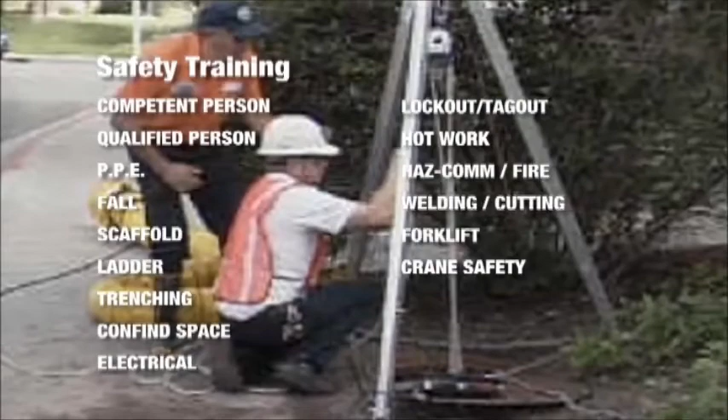Safety training topics: competent person, qualified person, PPE, fall protection, scaffold, ladder, trenching, confined space, electrical, lockout tagout, hot work, HAZCOM, fire, welding, cutting, forklift, and crane safety.

Foreman training. OSHA 10-hour. All crew leaders, foremen, supervisors, and designated safety personnel will be required to have taken the OSHA 10-hour in order to run any crew on Construction Zone projects.

Job hazard analysis. Introduction. Many accidents can be reduced if we work together and share our safety knowledge. Job hazard analysis, or JHA, is a basic approach to developing accident prevention procedures by documenting the first-hand experience of workers and supervisors. A JHA can be a central element in a safety program.

JHAs can be used to orient new employees to specific work tasks, and as training tools when performing tasks that are not routine or involve special situations.

Job hazard analysis involves four basic steps: one, select a job to be analyzed; two, separate the job into basic steps; three, identify the hazards associated with each step; four, control each hazard.

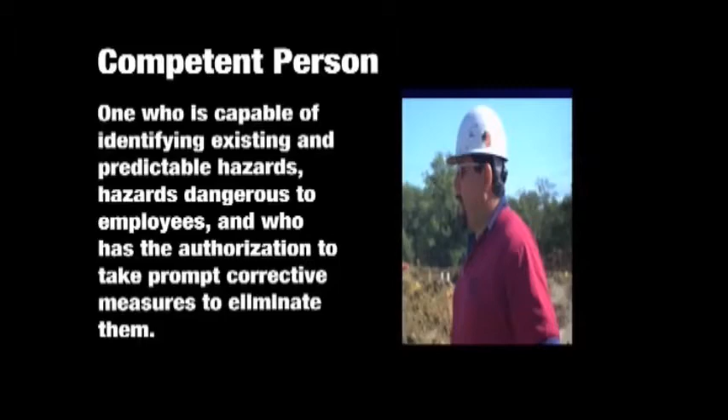Qualified person: one who, by possession of a recognized degree, certification, or professional standing, or who by extensive knowledge, training, and experience, has successfully demonstrated their ability to solve problems relating to the subject matter, the work, or the project.

Foreman responsibility: maintain control of their employees at all times and ensure that the workers are aware of the hazards associated with the task assigned to them and that they have the proper PPE needed.

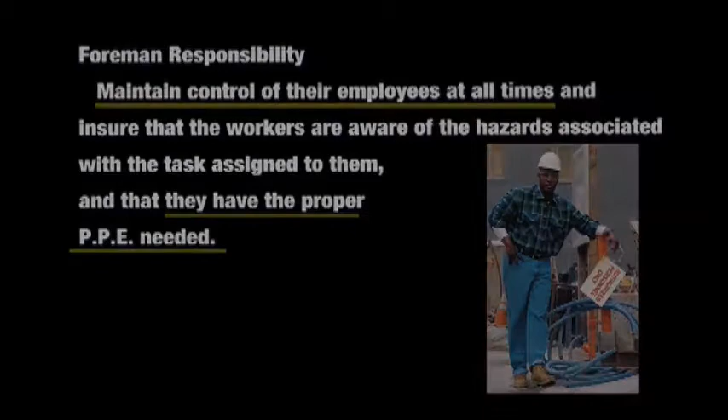Employees' responsibilities: follow all posted safety rules and regulations. Wear appropriate personal protective equipment as needed for the hazards presented by the assigned task. Correctly use all equipment, machinery, and tools. Never use any equipment in which you have not been authorized or trained to use. Immediately report all near misses, accidents, and injuries.

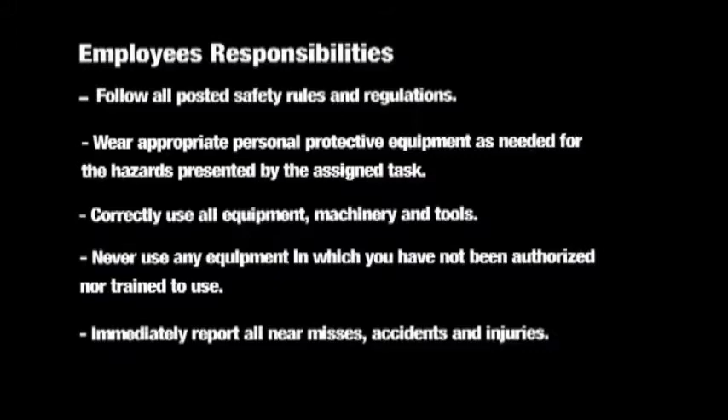PPE: eye safety, head, face, hands, feet, respirator, body. Can you see the difference? Employees' failure to use required PPE.

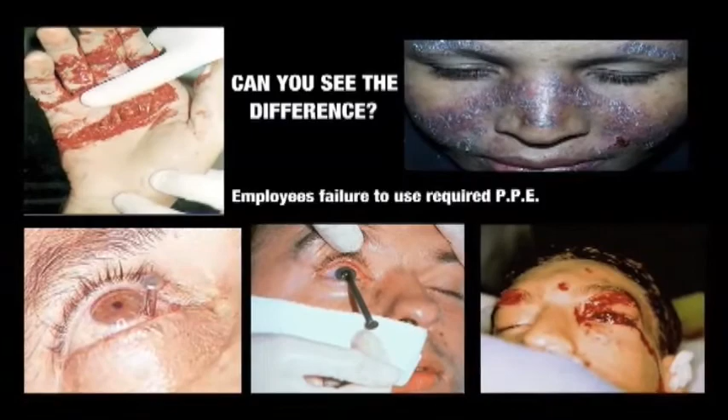100% eye protection will be mandatory while on construction site, per ANSI Z87. Hard hats will be worn with the bill to the front 100% of the time while on site, except when welding. Both face and eye protection will be worn when chipping and grinding.

Reflective work vests will be worn at all times by those in charge of traffic control. Only leather work boots or shoes allowed. No athletic shoes, sandals, or unserviceable footwear permitted.

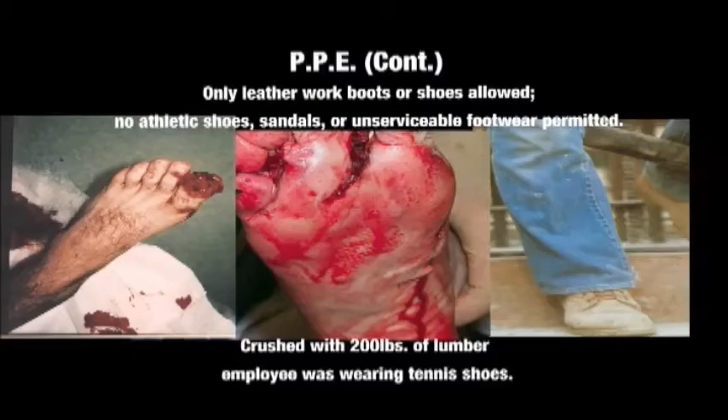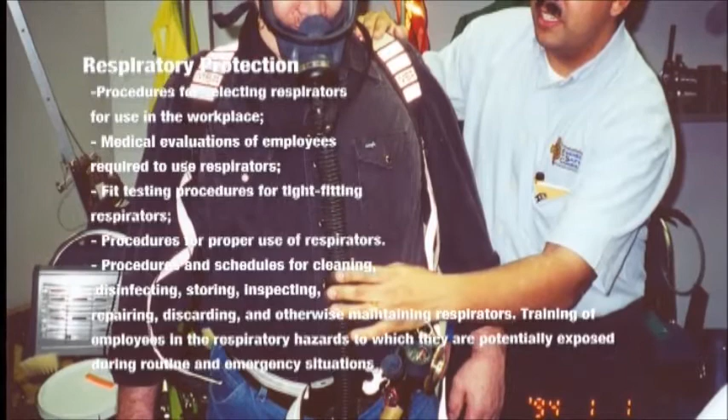Respiratory protection: procedures for selecting respirators for use in the workplace, medical evaluations of employees required to use respirators, and fit testing procedures for tight-fitting respirators.

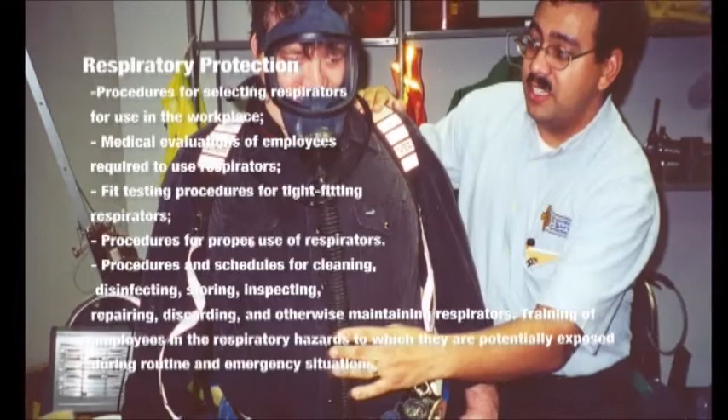Procedures for proper use of respirators, and procedures and schedules for cleaning, disinfecting, storing, inspecting, repairing, discarding, and otherwise maintaining respirators. Training of employees in the respiratory hazards to which they are potentially exposed during routine and emergency situations.

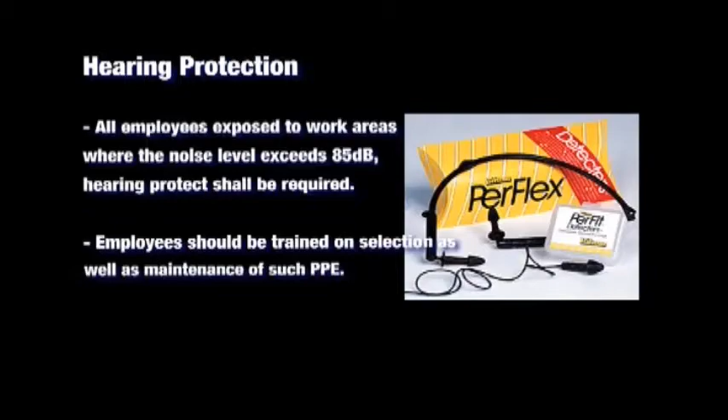Hearing protection: all employees exposed to work areas where the noise level exceeds 85 decibels, hearing protection shall be required. Employees should be trained on selection as well as maintenance of such PPE.

Code of conduct: harassment is prohibited. Always conduct yourself professionally. No loose-fitting or sexually explicit or profanity-type clothing. Shirts must have at least a 4-inch sleeve.

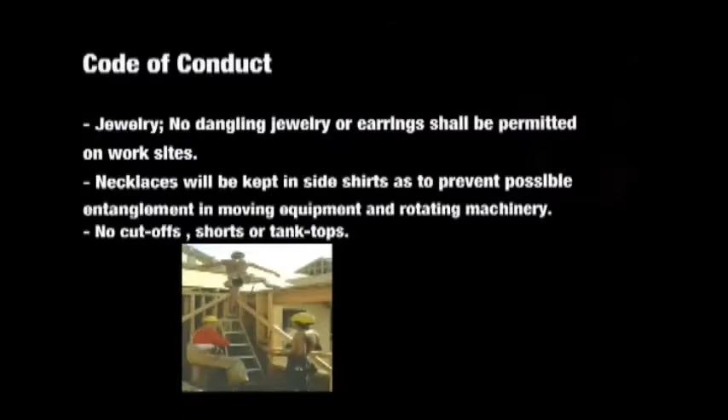Long hair will be neatly kept under the hard hat as to prevent serious injury caused by entanglement. No dangling jewelry or earrings shall be permitted on work sites. Necklaces shall be kept inside shirts as to prevent possible entanglement in moving equipment and rotating machinery. No cutoffs, shorts, or tank tops.

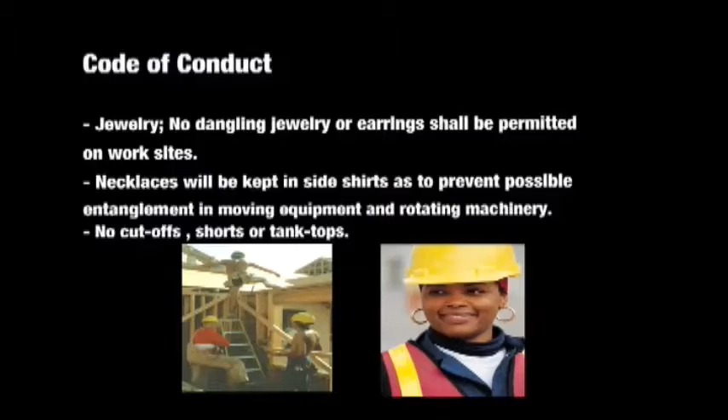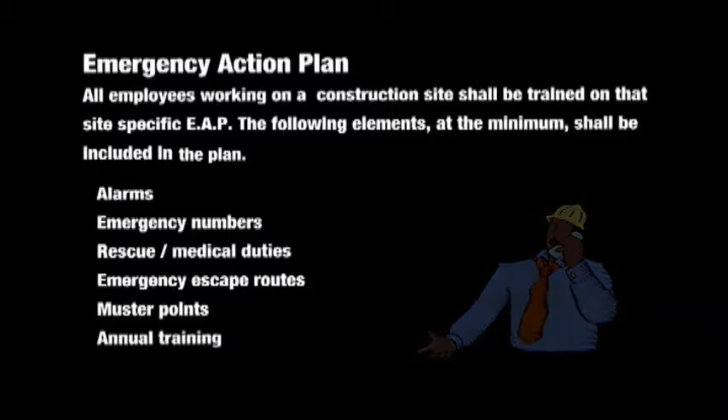Emergency Action Plan. All employees working on a construction site shall be trained on that site's specific EAP. The following elements at minimum shall be included in the plan: alarms, emergency numbers, rescue medical duties, emergency escape routes, muster points, and annual training.

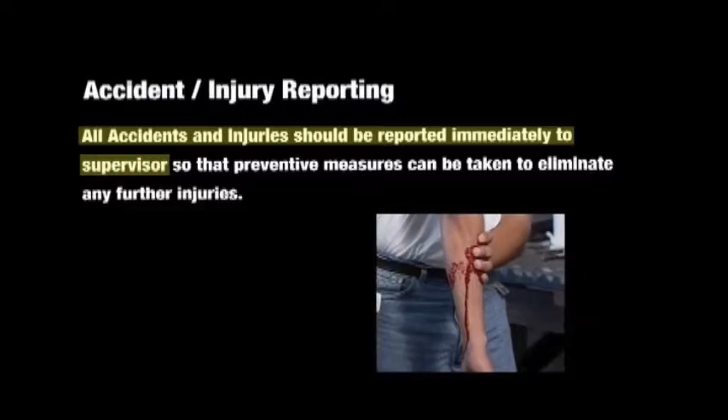Accident injury reporting. All accidents and injuries should be reported immediately to supervisors so that preventative measures can be taken to eliminate any further injuries.

Modified Duty Program. Each contractor, subcontractor, and tier contractor working on the construction zone projects will institute and maintain a modified duty program for on-the-job injured workers. In all cases possible, healthcare providers and physicians treating injured workers from construction zone projects will prescribe work restrictions consistent with the modified duty program, rather than prescribing days away from work.

Causes of death in construction. Fall protection, 1926.501. Every 4 minutes in the United States, someone suffers a fall injury. Last year alone, some 717 workers died of injuries caused by falls from ladders, scaffolds, buildings, or other elevations. How many times have you risked your life?

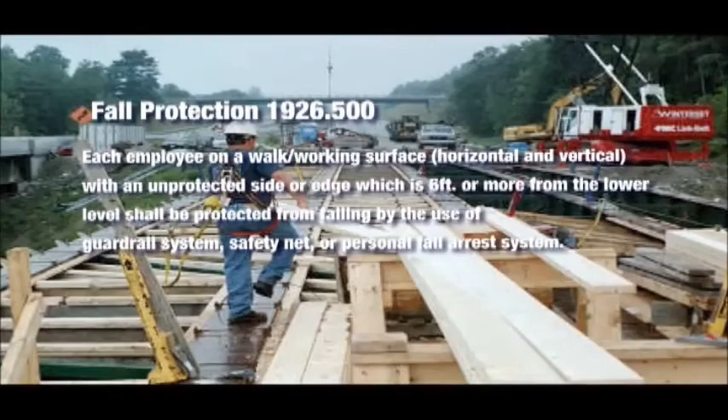Fall protection, 1926.500. Each employee on a walking working surface, horizontal and vertical, with an unprotected side or edge which is 6 feet or more from the lower level, shall be protected from falling by the use of a guardrail system, safety net, or personal fall arrest system.

Guardrail system regulations. Top edge height of top rails or equivalent guardrail system members shall be 42 inches plus or minus 3 inches above the walking working level. Guardrail systems shall be capable of withstanding, without failure, a force of at least 200 pounds applied within 2 inches of the top edge, in any outward or downward direction, at any point along the top edge.

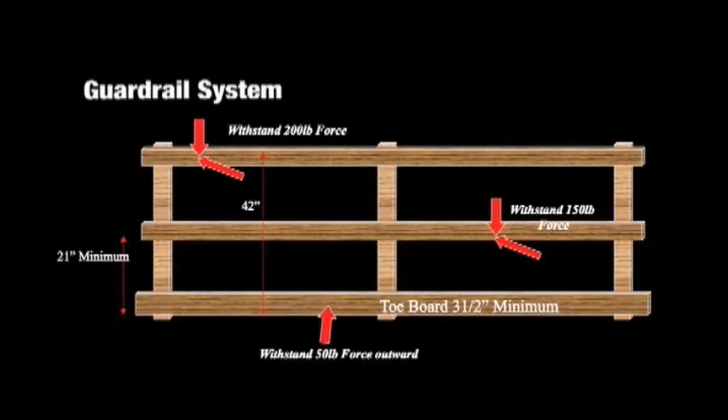Wire rope clips. Never saddle a dead horse.

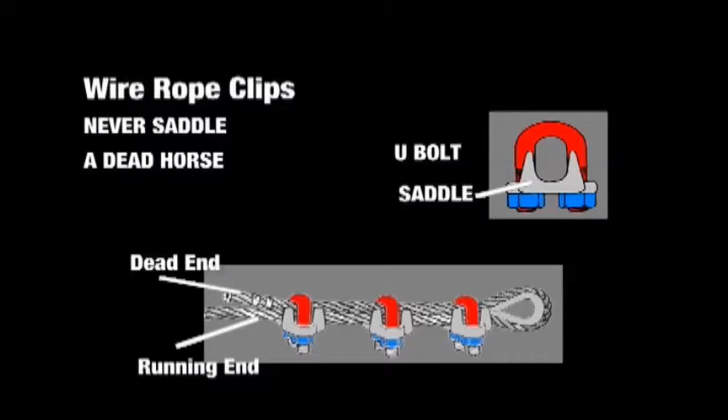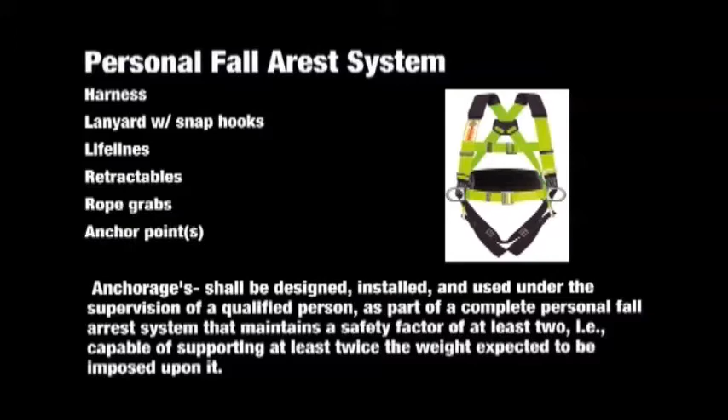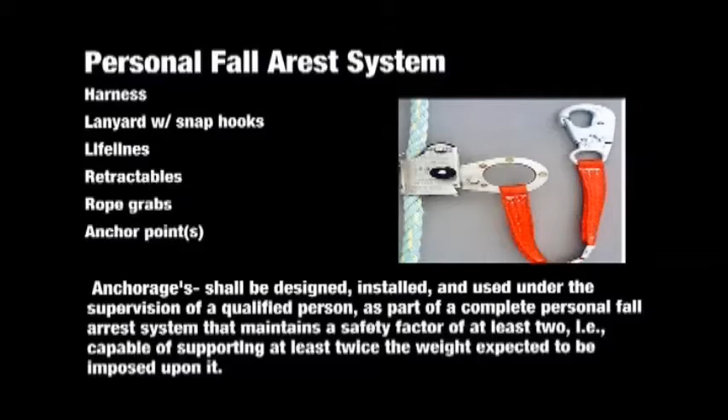Personal fall arrest system: harness, lanyard with snap hooks, lifelines, retractables, rope grabs, anchor points. Anchorages shall be designed, installed, and used under the supervision of a qualified person as part of a complete personal fall arrest system that maintains a safety factor of at least 2, capable of supporting at least twice the weight expected to be imposed upon it.

Anchor points. Anchorages used to attach personal fall arrest systems shall be independent of any anchoring being used to support or suspend platforms, and must be capable of supporting at least 5,000 pounds per person attached.

As per the new steel erection standards, steel erectors are required to wear fall protection when working at heights greater than 15 feet. However, on construction zone projects, fall protection will be required at 6 feet for all crafts.

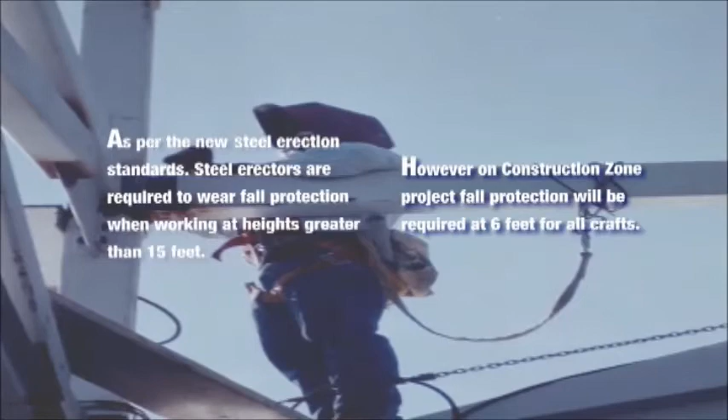PFAS. Always inspect body harness prior to use. D-rings should be positioned between shoulder blades. Harness should fit snug, yet not tight so as to cut circulation to legs. Never use the lanyard as a positioner.

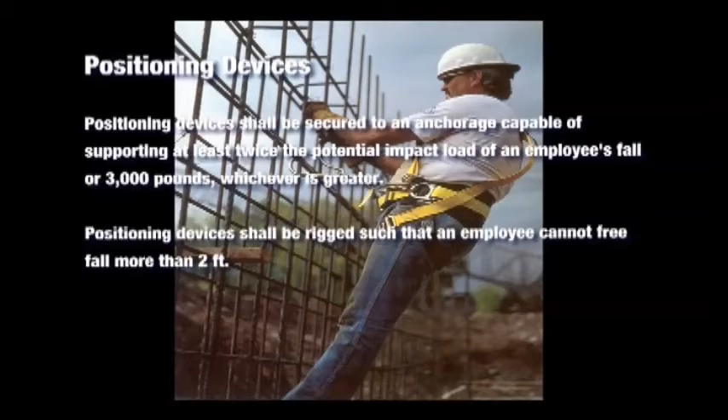Positioning devices shall be secured to an anchor capable of supporting at least twice the potential impact load of an employee's fall, or 3,000 pounds, whichever is greater. Positioning devices shall be rigged such that an employee cannot free fall more than 2 feet. As of January 1, 1998, only locking-type snap hooks shall be used.

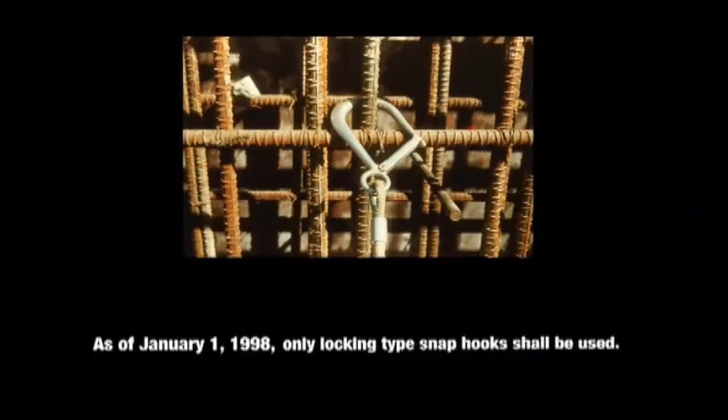Warning lines and safety monitoring systems. Warning line systems shall be erected around all sides of the roof work area, set 6 or 10 feet back, flagged every 6 feet, with a height between 34 inches and 39 inches, including sag.

Warning lines must support 16 pounds of force, with a tensile strength of 500 pounds. Workers, except those engaged in roofing work, must be kept inside the warning line. Points of access, materials handling areas, storage areas, and hoisting areas must be connected to the work area with an access way made of 2 warning lines. A barricade barrier shall be set across the access way when it's not in use.

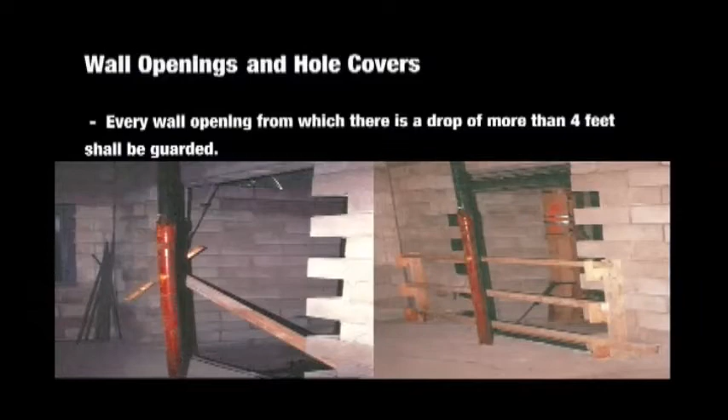Wall openings and hole covers. Every wall opening from which there is a drop of more than 4 feet shall be guarded.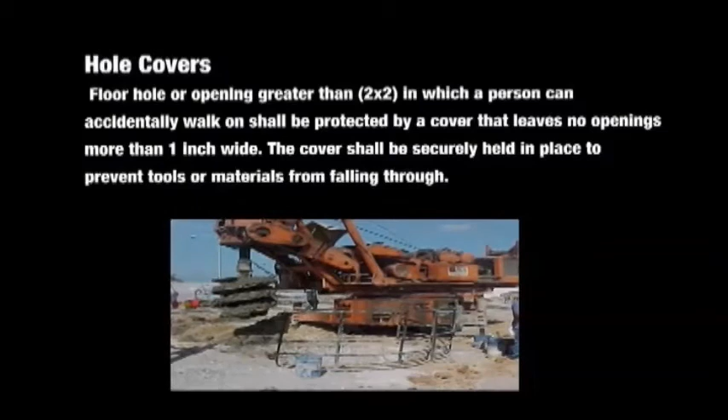Hole covers: a floor hole or opening greater than 2 by 2, in which a person can accidentally walk, shall be protected by a cover that leaves no openings more than 1 inch wide. The cover shall be securely held in place to prevent tools or materials from falling through.

An estimated 2.3 million construction workers work on scaffolds. Protecting these workers from scaffold accidents would prevent 4,500 injuries and 50 deaths every year. All of these can be controlled by compliance with OSHA standards.

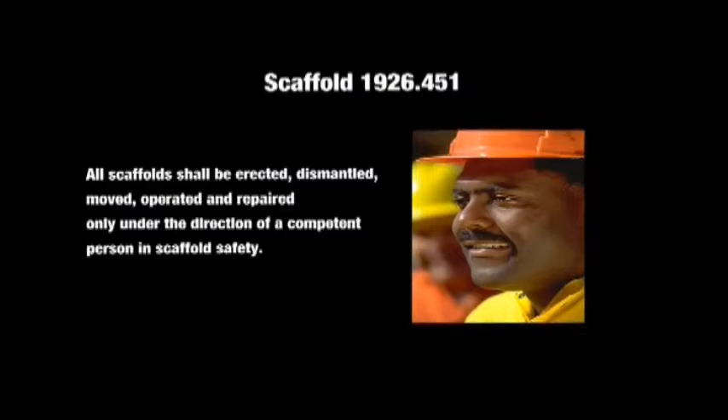Scaffold, 1926.451. All scaffolds shall be erected, dismantled, moved, operated, and repaired only under the direction of a competent person. Scaffold safety: all employees working on a scaffold will be trained by a qualified person on the recognition of hazards when working with scaffolds and the procedures for minimizing those hazards.

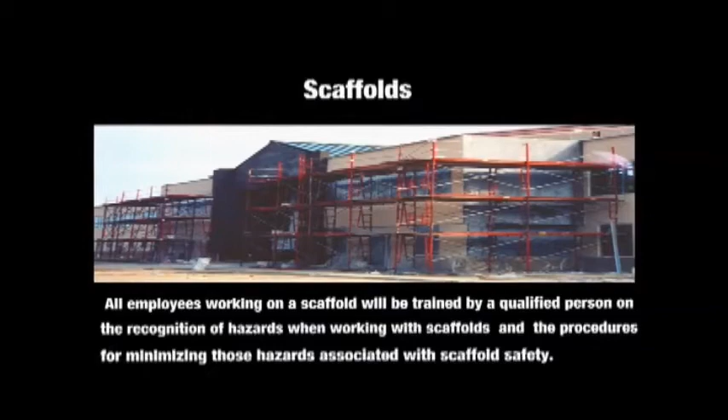Ground must be level, firm, and compacted prior to any scaffold being erected. Scaffold must be set on base plates or mud seals. Barricades should be placed around all scaffolds to keep other employees from walking underneath them.

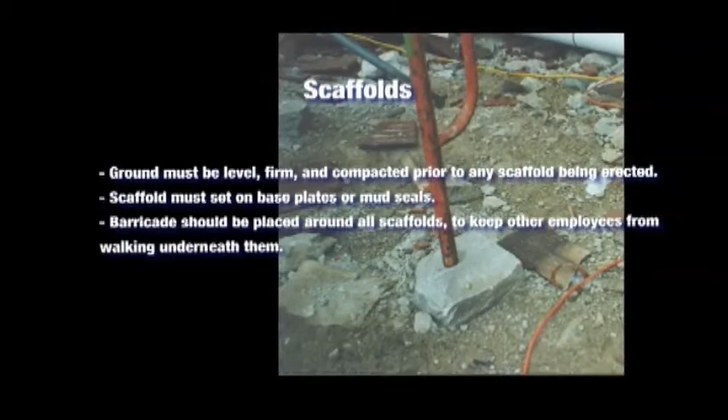Each end of a platform, unless cleared or otherwise restrained by hooks or equivalent means, shall extend over the center line of its support at least 6 inches and not more than 18 inches, unless a guardrail which blocks employee access to the cantilevered end is in place.

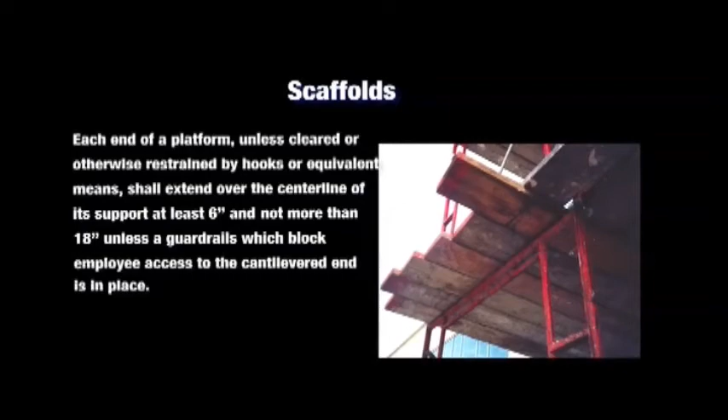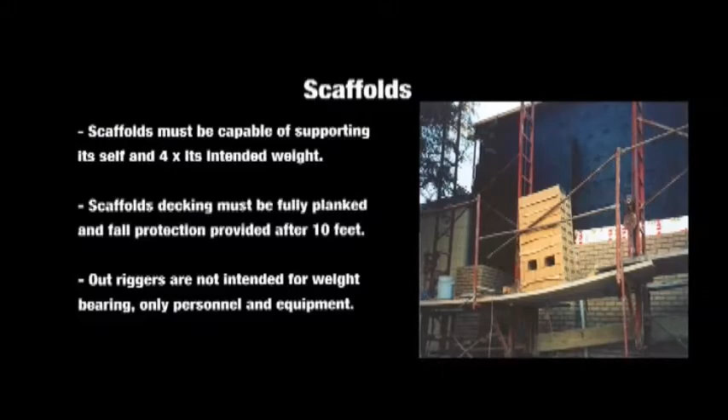End rails must be used at all scaffold corners to prevent anyone from falling off the scaffold. Scaffolds must be capable of supporting itself and 4 times its intended weight. Scaffold decking must be fully planked and fall protection provided after 10 feet. Outriggers are not intended for weight bearing, only personnel and equipment.

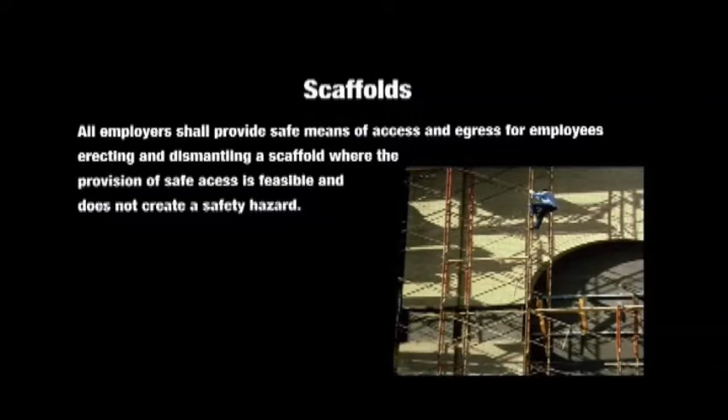All employers shall provide safe means of access and egress for employees erecting and dismantling a scaffold where the provision of safe access is feasible and does not create a safety hazard.

Aerial lift. Only trained and authorized persons shall operate an aerial lift. Belting off to an adjacent pole, structure, or equipment while working from an aerial lift shall not be permitted.

Lift controls shall be tested each day to determine safe working condition. Never supersede manufacturer's specifications on load limits or number of occupants permitted on the lift. Employees shall always stand firmly on the floor of the basket.

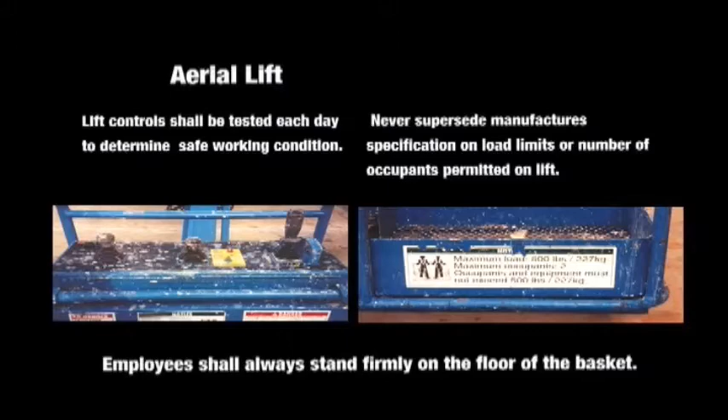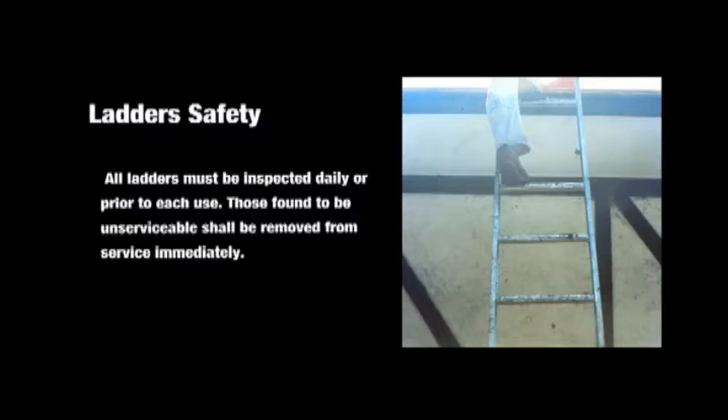Ladder safety. All ladders must be inspected daily or prior to each use. Those found to be unserviceable shall be removed from service immediately. Ladders should be set at a 4-to-1 ratio, extend 3 rungs or 36 inches beyond the edge, and secured.

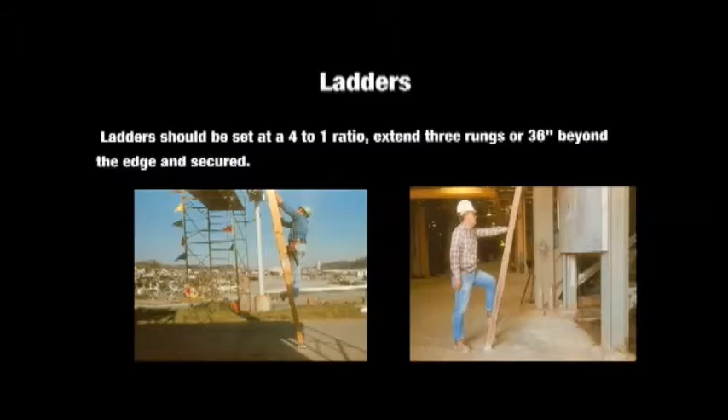3 points of contact should always be maintained when ascending or descending a ladder. A rope or pulley system may be implemented for the raising and lowering of tools and materials.

Always read and follow instructions and warning labels. Ladders may not be field modified for uses other than those intended by the manufacturer.

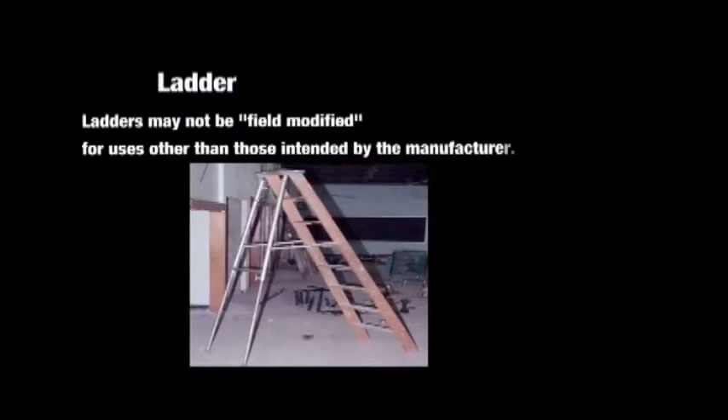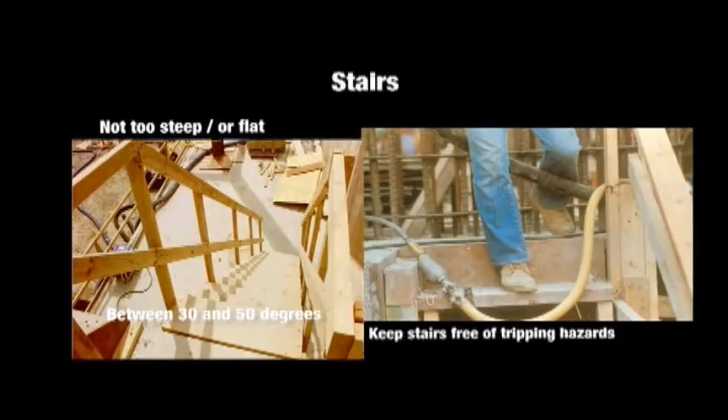Stairs should not be too steep or too flat, between 30 and 50 degrees. Keep stairs free of tripping hazards. Metal stair pans need to be filled or blocked with wood or other solid material before they're used. Stairs, ladders, or ramps shall be used when the break in elevation is greater than 19 inches.

Trenching and excavation. The National Safety Council rated excavation and trenching as the most hazardous job in the construction industry. 100 to 400 people are killed per year in excavations, and 1,000 to 4,000 are injured every year. As of 2002, there have been 25 trench fatalities in Texas.

Most deaths in trenches are from cave-ins. 50% of workers die trying to rescue other workers.

A narrow excavation has a width not greater than 15 feet. If forms or other structures are installed or constructed in an excavation so as to reduce the dimension measured from the forms or structure to the side of the excavation to 15 feet or less, the excavation is also considered to be a trench.

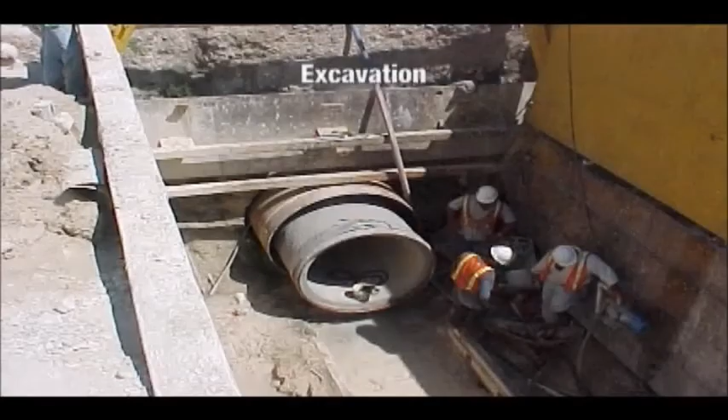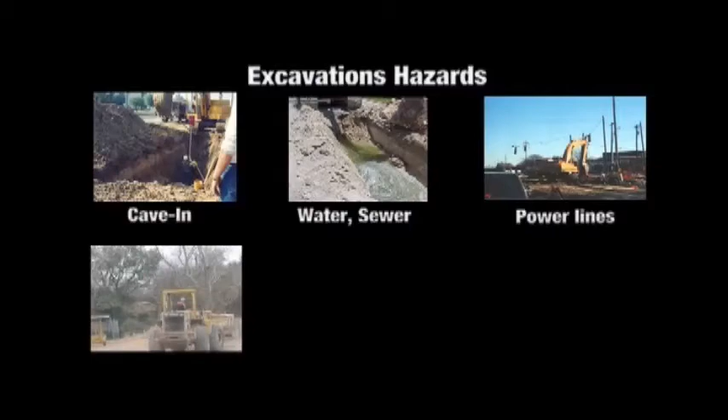Excavation hazards include cave-in, water, sewer, power lines, struck by equipment, falling objects, and falls.

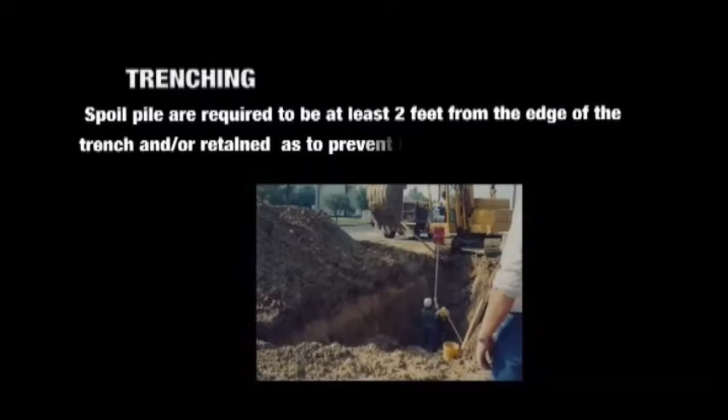Trenching. Spoil piles are required to be at least 2 feet from the edge of the trench and/or retained so as to prevent it from falling into the trench.

Determination of soil type. OSHA categorizes soil and rock deposits into 4 types: stable rock, Type A soils, Type B soils, and Type C soils. All trenches shall be revised daily and findings documented prior to entrance.

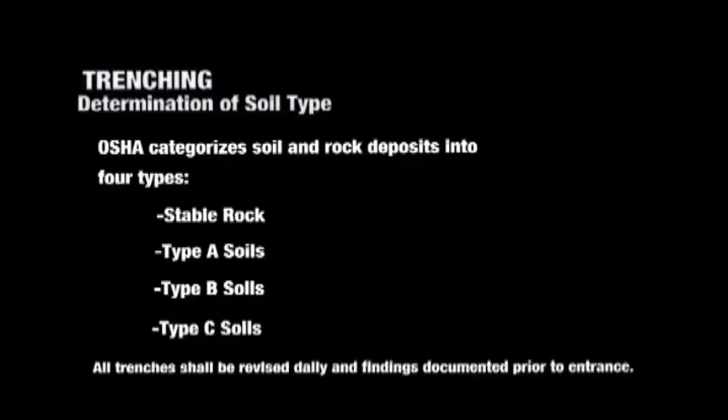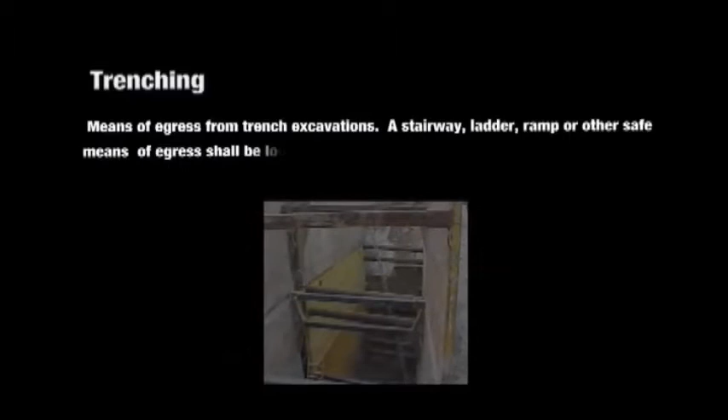Means of egress from trench excavations. A stairway, ladder, ramp, or other safe means of egress shall be located in trench excavations that are 4 feet or more in depth, so as to require no more than 25 feet of lateral travel.

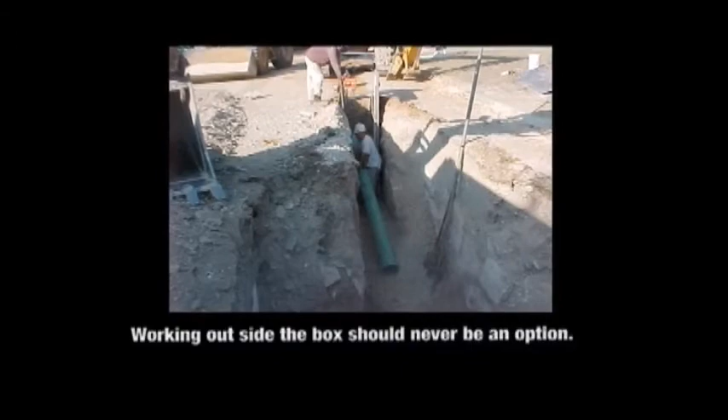Working outside the box should never be an option. Choose the right box for the job.

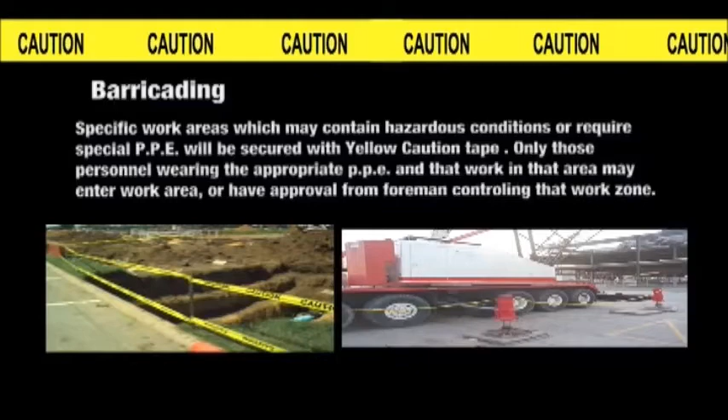Barricading. Specific work areas which contain hazardous conditions or require special PPE will be secured with yellow caution tape. Only personnel wearing the appropriate PPE who work in the area may enter, or those with approval from the foreman controlling that zone.

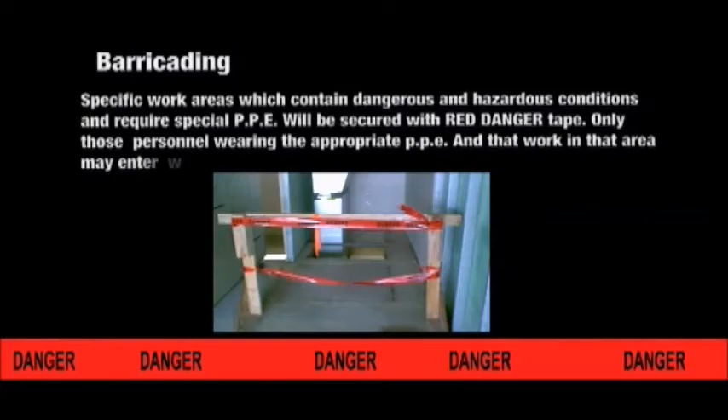Specific work areas which contain dangerous and hazardous conditions and require special PPE will be secured with red danger tape. Only personnel wearing the appropriate PPE who work in that area may enter, or those with approval from the supervisor controlling that work zone.

Confined space: a space large enough and so configured that an employee can bodily enter and perform assigned work, yet has limited or restricted means for entry and exit and is not designed for continuous occupancy.

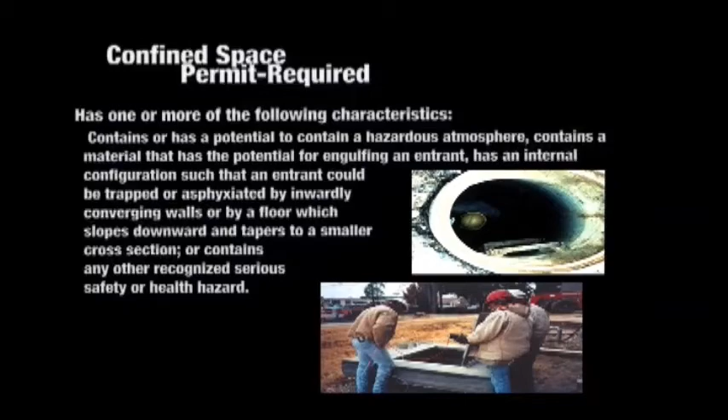Electrical safety. All electrical cords shall be inspected daily or prior to use. All frayed and unserviceable cords shall be removed from the worksite or repaired.

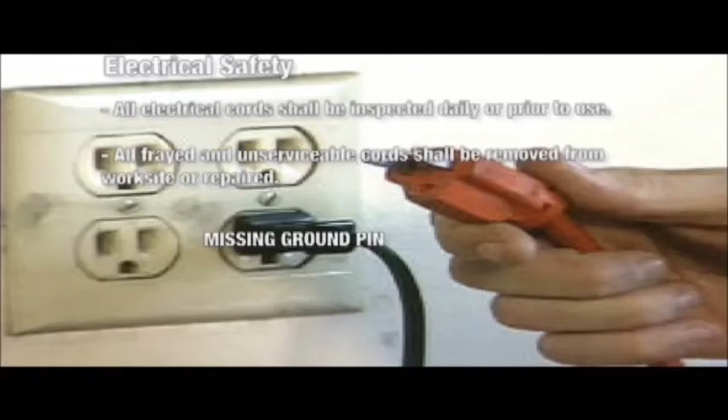Electrical cords shall not be allowed to run through doorways or over roads where they may become frayed or subjected to construction traffic without added protection. Tape shall not be used as insulation to cover illegal splices, frays, or damaged cords.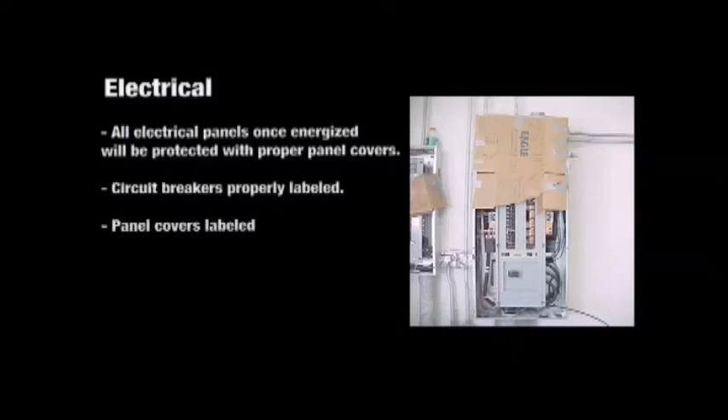All electrical panels, once energized, will be protected with proper panel covers. Circuit breakers properly labeled, panel covers labeled. Homemade electrical cords will not be permitted on job sites.

Hazard communication, your employer's responsibility: develop a written HAZCOM program, make MSDS available to employees, identify and list chemicals in their workplace, label all chemicals, provide training, and communicate the hazards.

Employees' responsibilities: read and understand the MSDS and label, handle chemicals properly, you must be trained. Secure the container, tighten the lid, store in upright position.

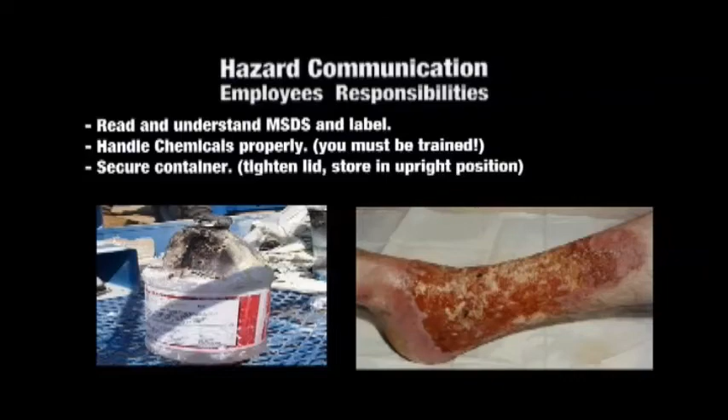HAZCOM: all employers shall develop, implement, and maintain at each workplace a written hazardous communications program. This program will identify all chemicals located at that facility. A list of chemicals accompanied by the distributor's MSDS shall be accessible to all employees.

Greases, fuels, paints, corrosives, flux, strippers, gasoline, diesel, oils, gases, adhesives, lubricants. Labels.

All work areas shall be cleaned on a regular basis to prevent any accidents or injuries caused by slips, trips, and falls, and possible fires.

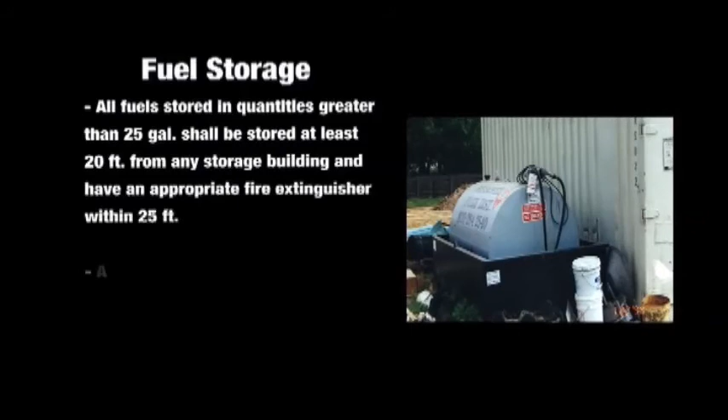Fuel storage: all fuel stored in quantities greater than 25 gallons shall be stored at least 20 feet from any storage building and have an appropriate fire extinguisher within 25 feet. The area shall also be free of trash, debris, and any other combustibles.

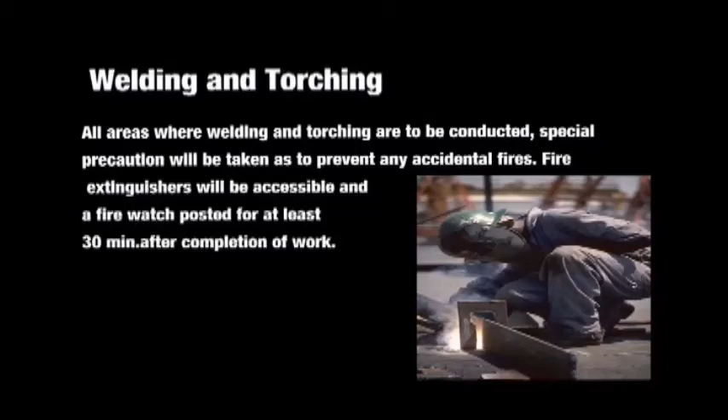Fire prevention. Every year, hundreds of deaths occur when employees who have not been trained on fire extinguisher safety or proper use of them attempt to extinguish a fire and either cause serious injuries to themselves or fatal injuries to other employees.

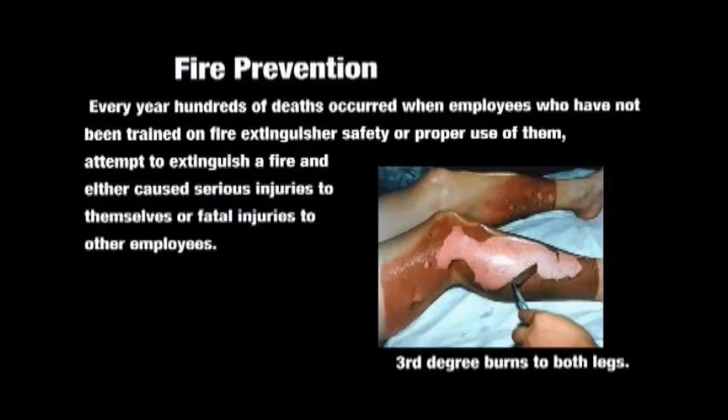Bloodborne pathogen safety. Blood and other body fluids may contain disease-causing agents such as HIV and hepatitis A or B.

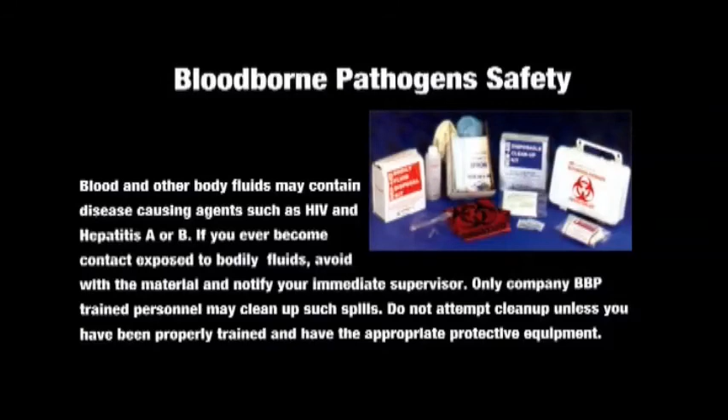If you ever become exposed to body fluids, avoid the material and notify your immediate supervisor. Only company BBP-trained personnel may clean up such spills. Do not attempt cleanup unless you have been properly trained and have the appropriate protective equipment.

Crane safety. Crane operators shall be trained and have related experience in addition to being familiar with safe crane practices. Operators should also have a complete understanding of all manuals, maintenance, and operating instructions provided for the specific crane in use. Operators shall have no physical, visual, or mental reactions or impairments that will affect the safe operation of the assigned crane.

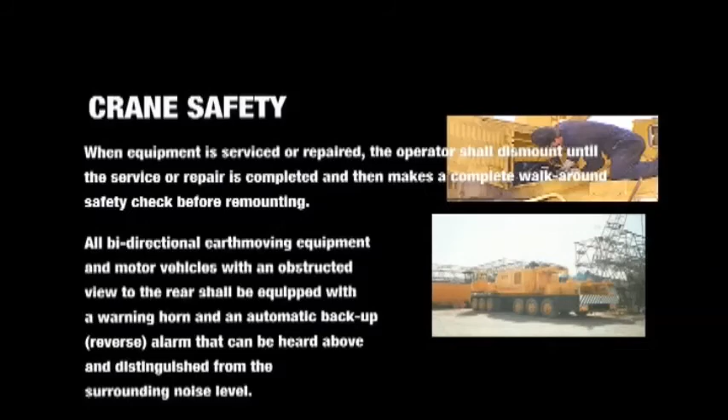All cranes shall receive daily, thorough inspections in accordance with the manufacturer's recommendations or applicable governing standards. Rigging equipment, slings, softeners, bridles, blocking cables shall be in good condition, identified to capacity, and properly stored when not in use.

Earth-moving equipment and trucks. When equipment is serviced or repaired, the operator shall dismount until the service or repair is completed and then make a complete walk-around safety check before remounting.

All bidirectional earth-moving equipment and motor vehicles with an obstructed view to the rear shall be equipped with a warning horn and an automatic backup or reverse alarm that can be heard above and distinguished from the surrounding noise level.

All off-highway earth-moving equipment and trucks such as loaders, dozers, scrapers, motor graders, rock trucks, tractors, rollers, and compactors will be equipped with rollover protective structures, ROPS, and seat belts per OSHA standards.

Seat safety belts shall be installed on and used by the operators of equipment provided with ROPS.

Mobile equipment shall not be left unattended unless parked securely to prevent movement, with all ground-engaging tools lowered to the ground, brakes set, and engine off.

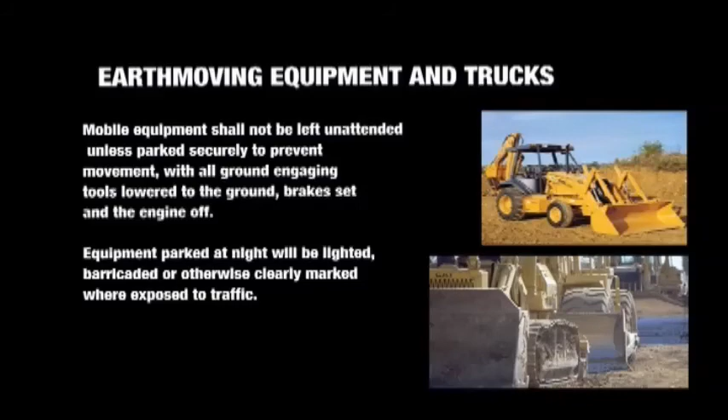Equipment parked at night will be lighted, barricaded, or otherwise clearly marked where exposed to traffic.

Personnel will not be transported or ride on equipment or vehicles that are not equipped with seats for passengers. When fueling equipment or vehicles with gasoline or liquefied petroleum gas, LPG, the engine shall be shut down.

Saving time will not always save you money.

Construction zone key safety issues. Safety is everyone's first job. All workers must be trained on how to perform their job safely. Hard hats, safety glasses, and proper footwear must be worn at all times.

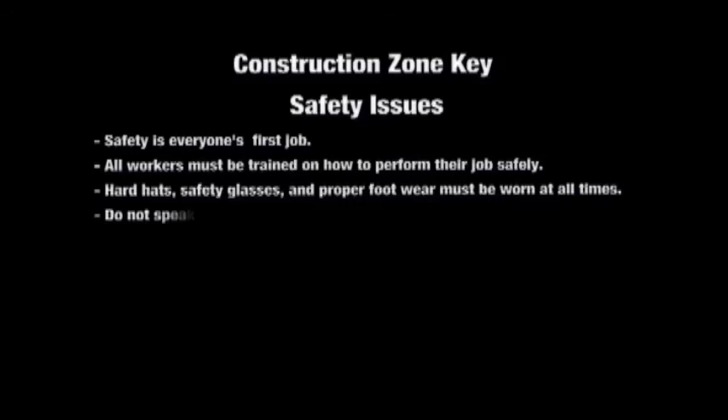Do not speak to students or staff. Report all injuries immediately to your supervisor. A modified duty program is in effect on all projects.

Report all safety hazards to your supervisor. No tobacco products are permitted on construction zone projects. Housekeeping is important. Clean as you work.